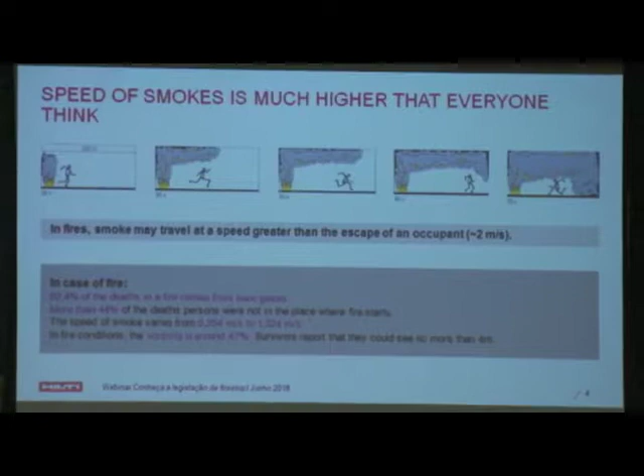One of the reasons is because smoke travels much quicker than fire. Smoke can move at a speed of 2 meters per second. There are plenty of analyses which show that. So we have 62% of deaths which come from asphyxia. More than 44% of people who die were not in the room where the fire started, which means the smoke travels from one room to another.

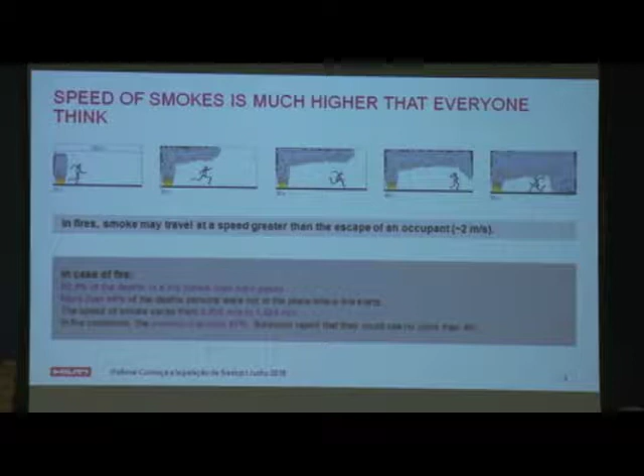In fire conditions, you also need to realize that smoke creates something like fog. You do not see anything. Okay?

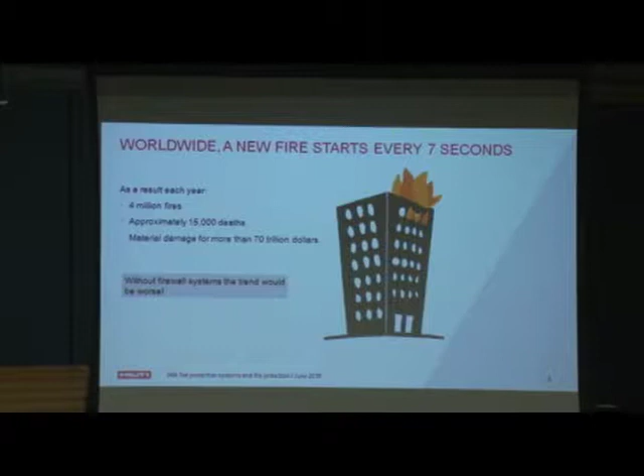In addition to that, we know that a fire starts every 7 seconds all over the world. So a lot of fires, and this really creates a lot of damage.

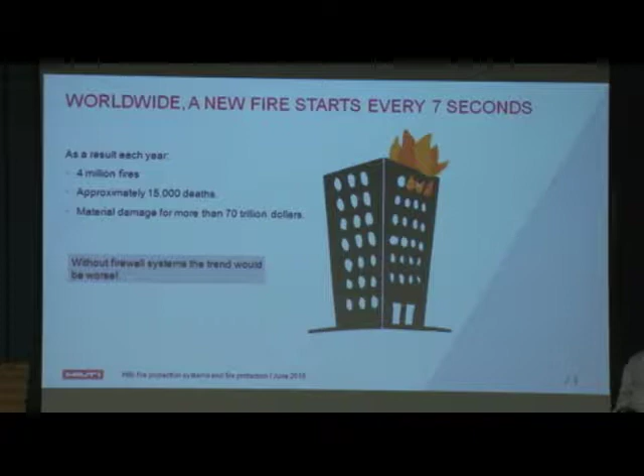In general, except for the example we saw this morning, the structure of a building is designed in accordance with fire safety. Compartmentation is there, but everybody forgets that when there's a fire stop wall, after the fire stop penetration, when we speak about fire stop product installation, it's only to close penetrations. Here you have a few examples where there were fires.

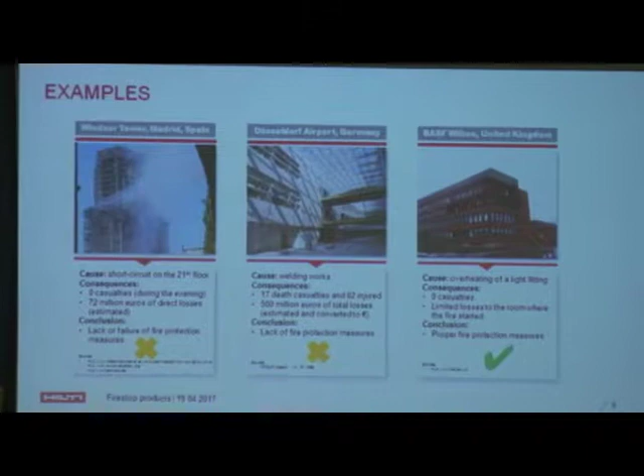It's not exactly the same because this is an international presentation, so it's not coming from Brazil, but I'm sure I could find the same example in Brazil. The first one was a short circuit on the 21st floor, and there was a complete lack of fire protection—building collapse. The second one was during site work for welding, and again a lack of fire protection, and the building didn't collapse but had to be rebuilt.

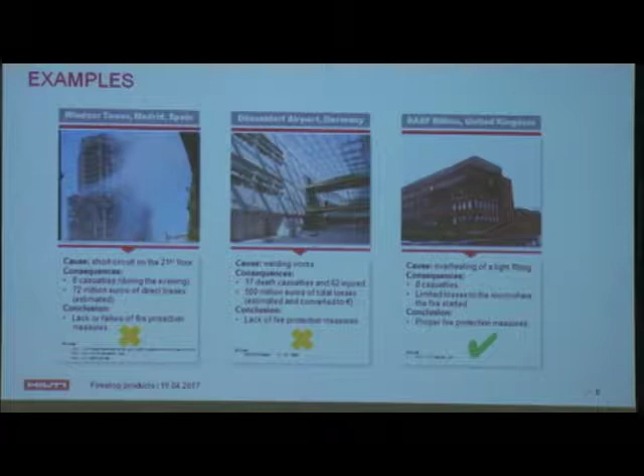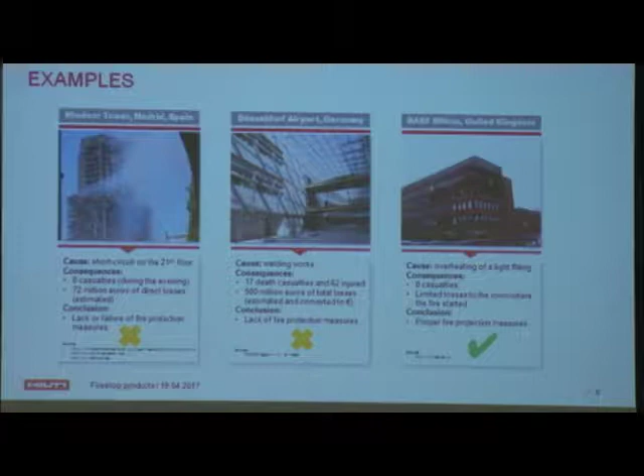The third one is also an example of a fire, but this time the fire protection was completely done correctly, including fire protection for penetrations. As you can see, 0 deaths, really limited consequences, just on the room where the fire was. So fire protection is a mixture of plenty of things, but openings is something which is important.

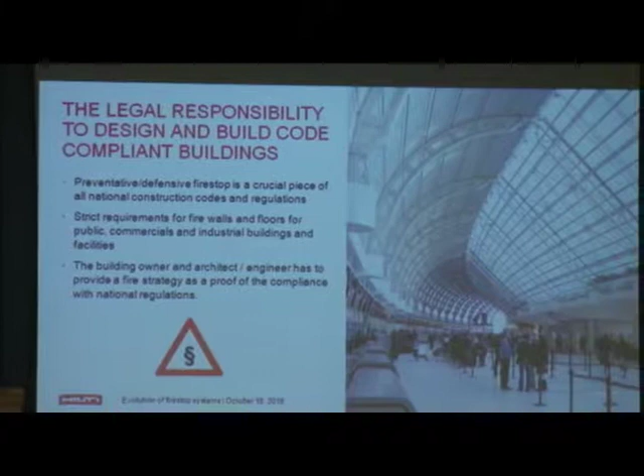If we go to regulation, I will not be the one who teaches you about regulation in Brazil—you know it much better than me. But there are a few things we can say together, because it's the same all over the world. It's the same in my country, in France, in Europe, in the US, in Brazil. It's the same everywhere.

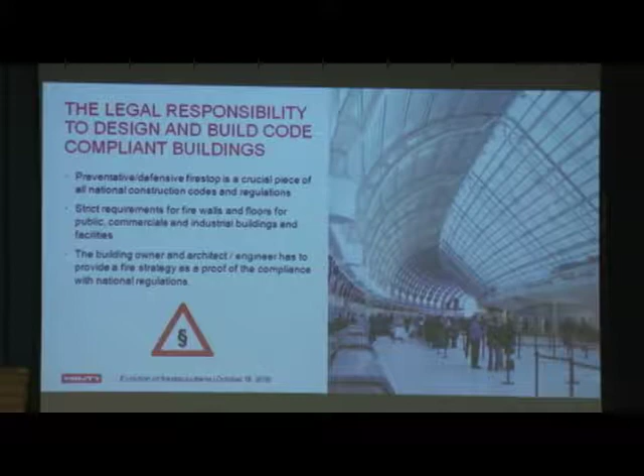Fire protection is crucial—it's a crucial piece of building engineering. And when we say fire protection, it's active and passive protection. I heard this morning about sprinklers, I've seen some hoses, and this is active protection. But passive protection is also very important to make sure that the fire stays in the place where it starts.

There is also something I like to remind everyone of. I don't know who you are—Camila told me that there are some constructors, some engineers, maybe some architects, some firemen. Everybody has a role in fire protection. It's not reserved just to the one who will install it.

It's also the role of the architect to schedule this very upstream, when we start the building design, going to the specifiers, the design office, who should specify it—not just say fire protection should be there, because this means nothing, and the constructor afterward will not know which product to use. So the specifier should really specify, and then the constructor should install the correct product. If we have the full chain of responsibility fulfilled, we are sure that in the end we arrive at the third example: one building, a fire, no damage.

And this is what we all want.

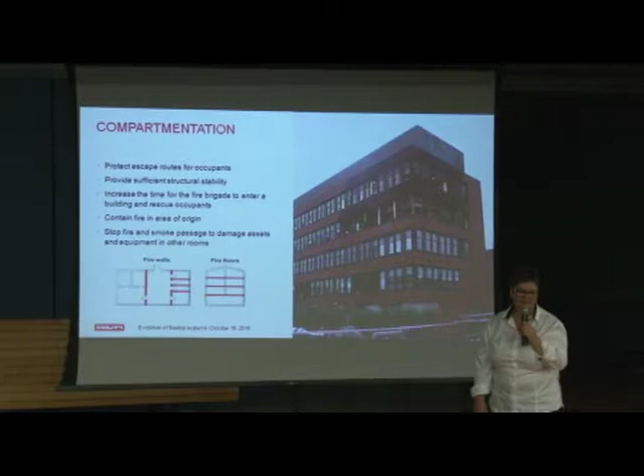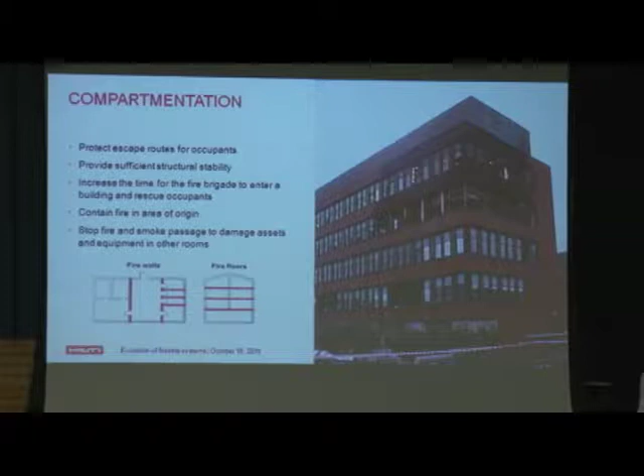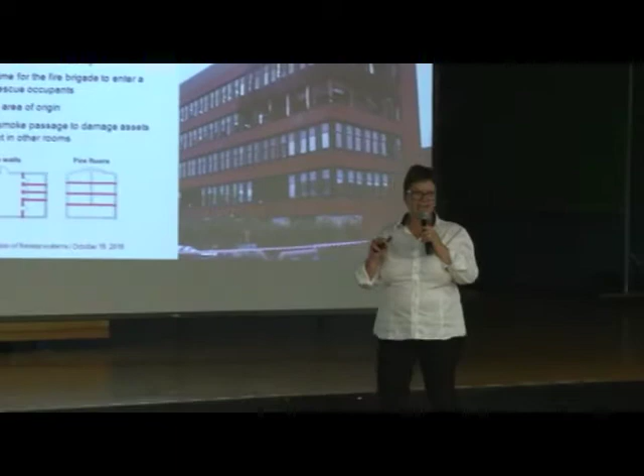Compartmentation - despite the fact that everybody thinks it's to protect the building, the main reason of compartmentation is to protect the fireman and the person who are inside the building to escape, and the fireman to enter to help those guys to escape. This is the ultimate goal. We want 0 deaths. Of course, if on top we can also protect the building, it's good.

But the main reason is really why we say, for example, that a firewall should remain 2 hours. After 2 hours, we think that the people - when I say we, it's the ones who prepare regulation - thinks that there will be no more people inside. So if the building collapses, it collapses, but at least there is no death. And so we have horizontal compartmentation.

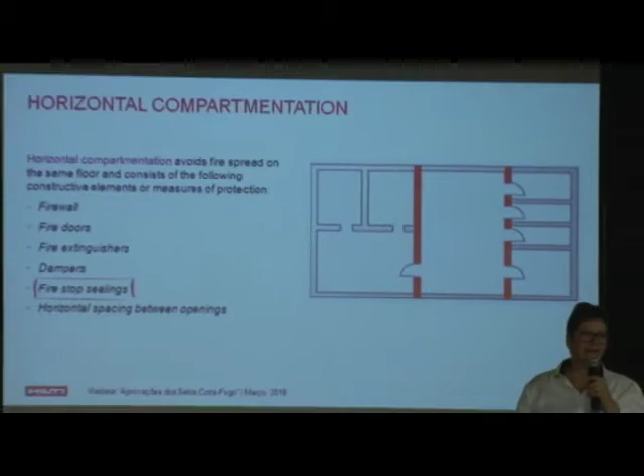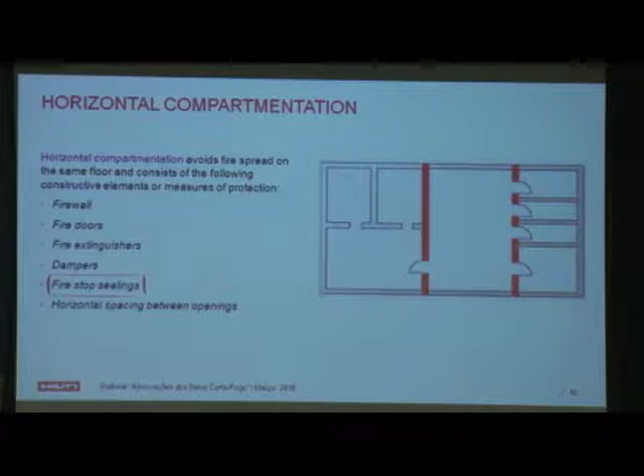I'm sure you have all seen a building, a hotel, a hospital, where you have a fantastic firewall, super fire stop doors, and just on top, a nice hole with pipes and cables, not closed. So what do you think is the efficiency of the wall and the door if just above there is a big hole with nothing to close it? Nada. Forget it.

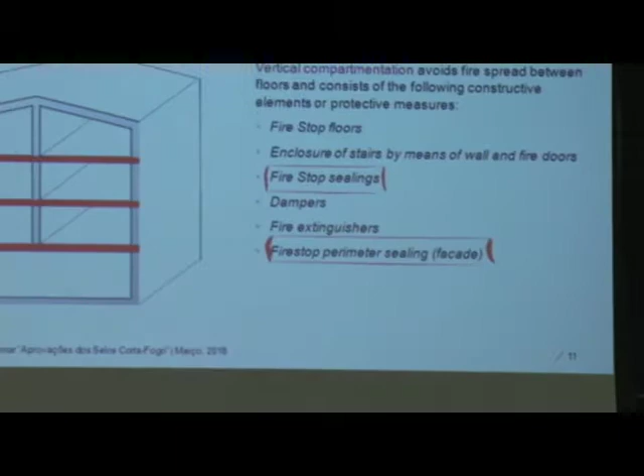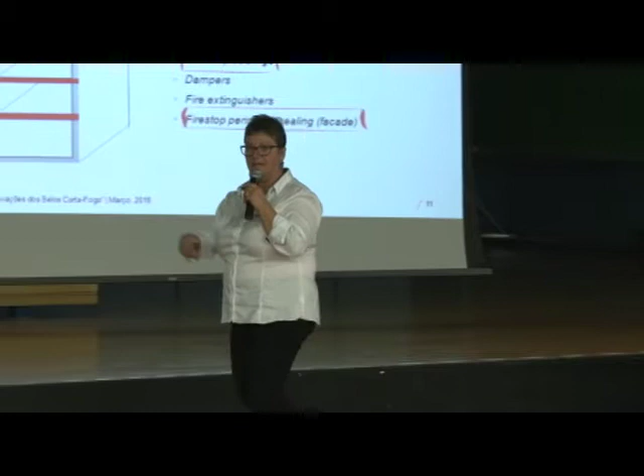The same for vertical compartmentation. The vertical compartmentation is, of course, for the floors, but it's also for the facade. Everybody has seen a tower, sadly, in fire, and we see the fire jumping from outside, from one floor to the other, because the facade is not protected. Again.

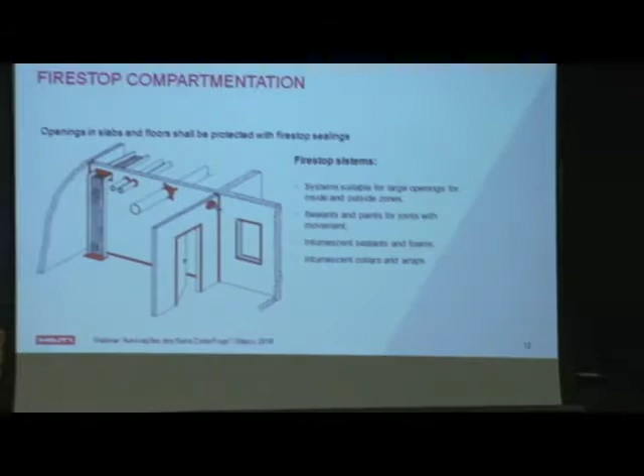And now we arrive to what I'm more used to - our product. You have plenty of different things in a fire. Is there a laser?

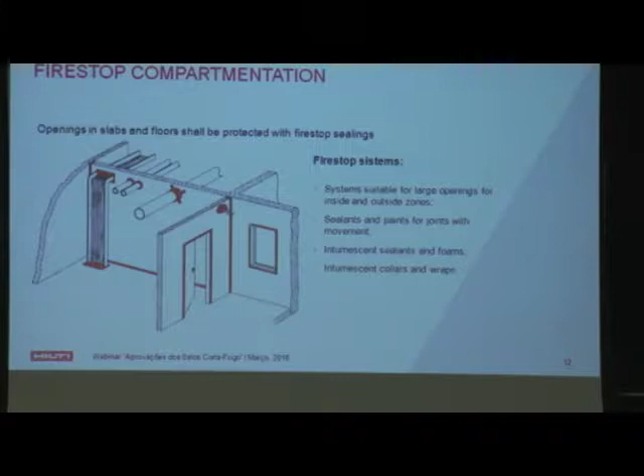Yes. So, doors, walls, floor, windows, okay, we all know. But here you see there is a cable. Here there is a pipe. Here you have 2 pipes. Here you have a cable tray. All these openings, if they are in a fire stop wall or a fire stop floor, they should be closed.

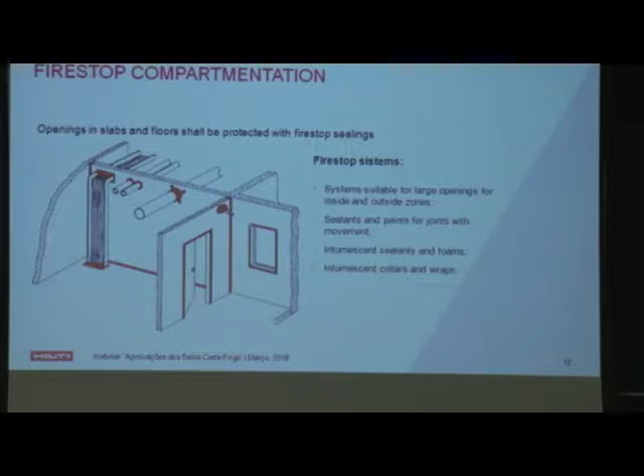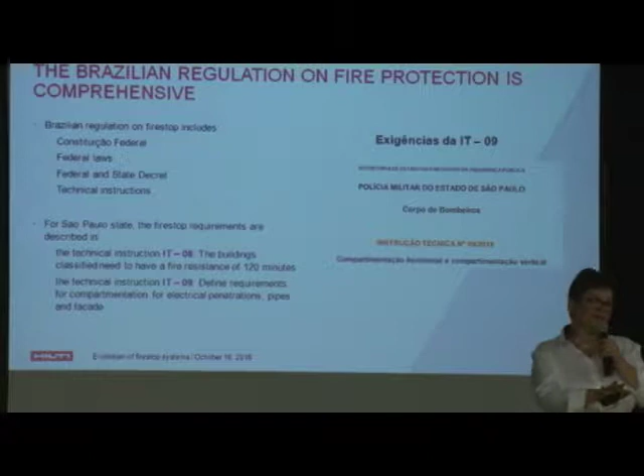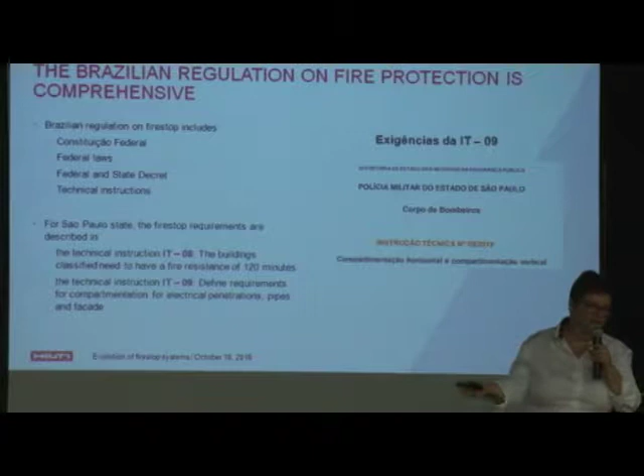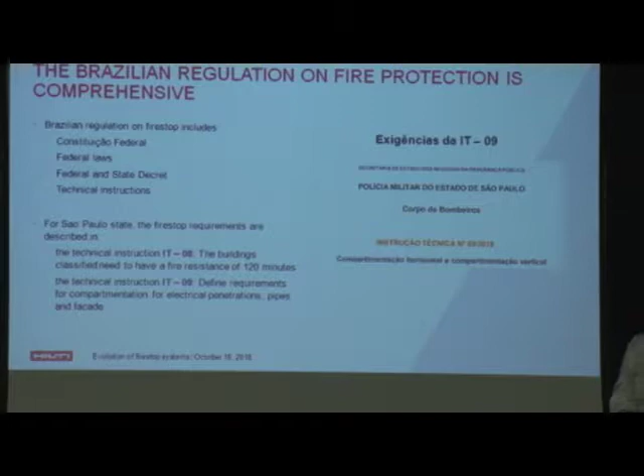I put this just as a reminder, but again, you know much better than me the regulation of fire stop in Brazil. All what I know is what Camilla told me during webinars. I'm listening to the webinars she's doing, and I know that there is plenty of regulation - federal regulation, state regulation, local regulation, standards, fireman documentation. You have plenty of documents. Now the main thing is to make it endorsed, to make it used, to make it live. So I will not describe this. It's your role, it's not mine.

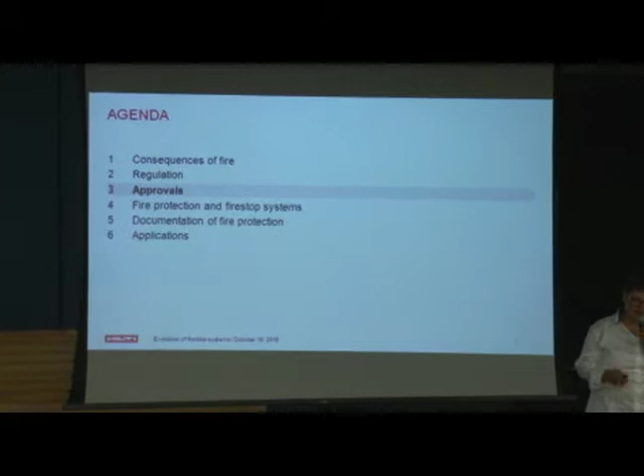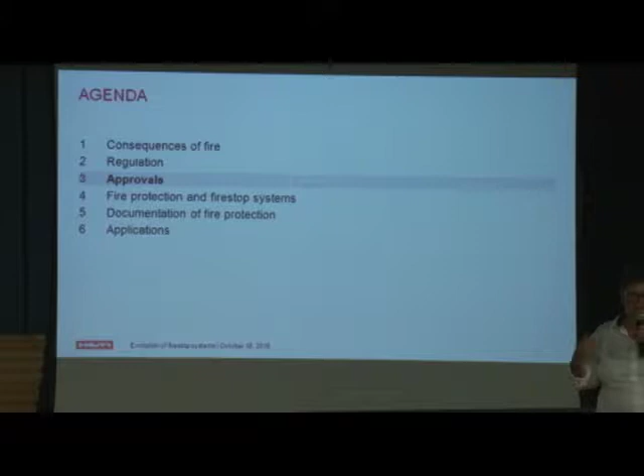And I will go to approvals, because there is several systems all over the world, including in Brazil, which are different. When we speak about approvals, it's a product which has proven that it has some fire resistance, in our case, with a third party. So it's not the manufacturer itself which says my product is good, because we can all say this. It's someone else.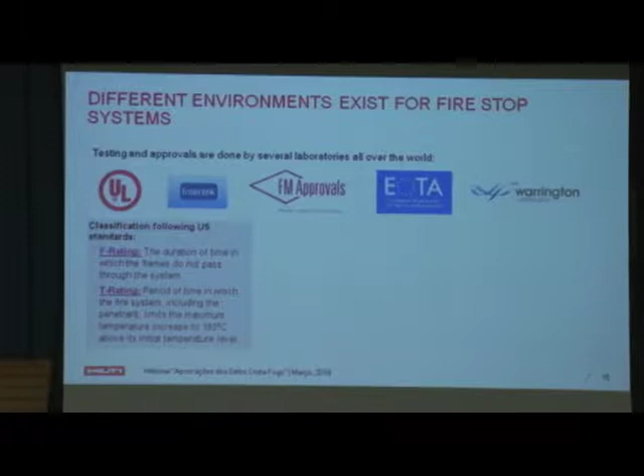So we have different systems. And here in Brazil, it's the third one, but sometimes we use the two first. The first system is a US system. So you have a certification which is done by UL, and they follow two different ratings, the F rating and the T rating. The F rating is obvious - it's a time where the fire, the flames, will not go from one side to the other.

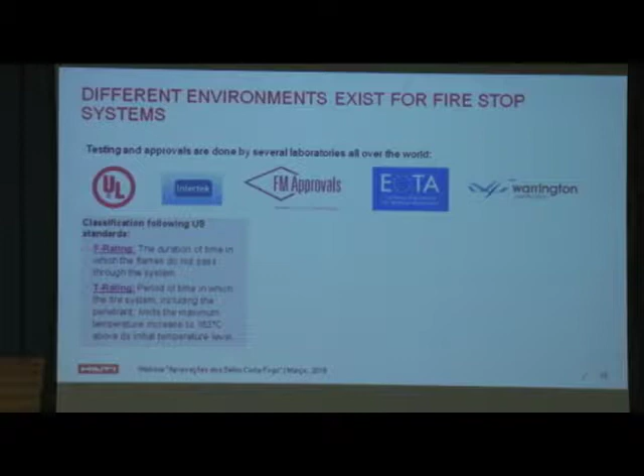In Europe, it's a little bit different in terms, but at the end it's the same. We measure exactly the same. Maybe there is one small test which is different, but at the end it's exactly the same. We measure the time where the fire do not go from one room to the other, and we measure the time where the smoke stays, and we also measure the time where the temperature on the other side of the fire do not increase more than 180 degrees.

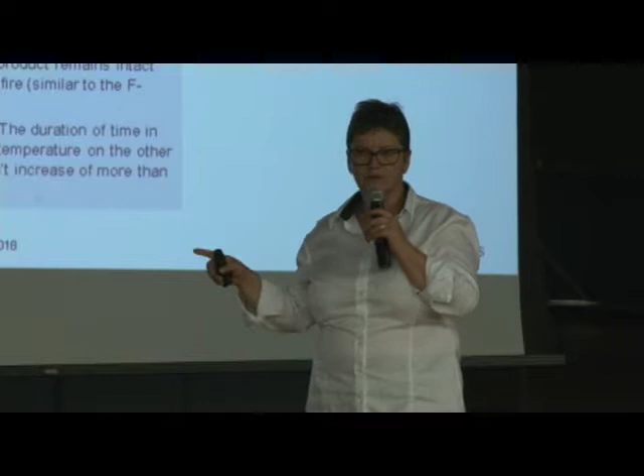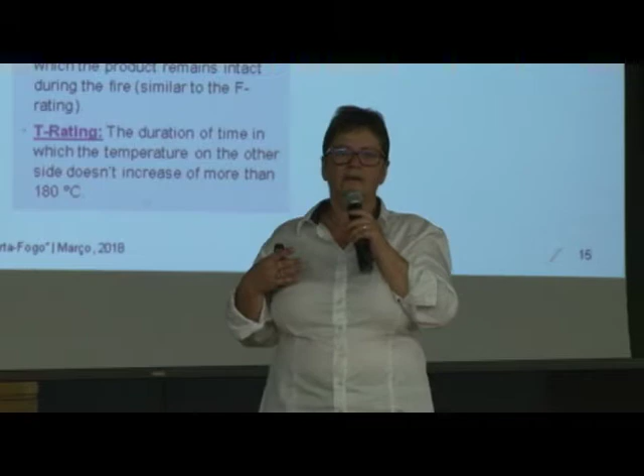Because if you have too high a temperature in the other room, even if the fire do not jump, there can be some auto-ignition because it's too hot. And if it's too hot, you have some product which can auto-ignite. I don't know if you have seen some video, but I have seen some which are very impressive, where you see, just by heat, you see

auto-ignition. And the third system, which I put here, it's the Brazilian system. But at the end, it's not exactly the same, because in Brazil, we have only a test standard. We do not have approvals. We do not have a paper which says this product has this performance with acceptance criteria.

What Camila and the team do in Brazil is combine tests done in Brazil, of course, because we are in Brazil, with approvals which we have from other countries, from Europe or from US, depending on the case, depending on the product.

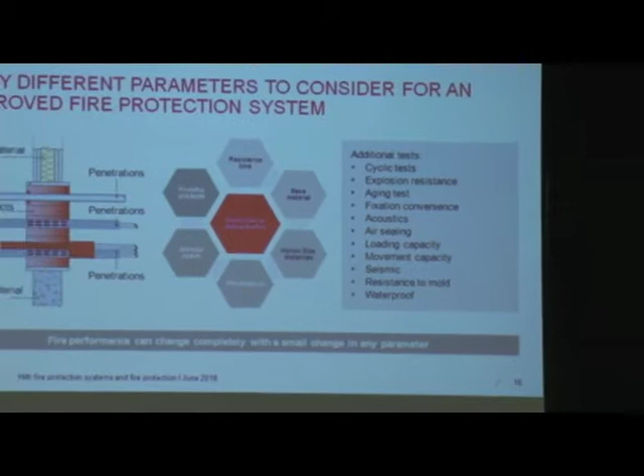Because when you look at fire resistance, you cannot imagine the number of parameters. When we create a fire stop test, you cannot imagine the number of different combinations we could have. Sometimes you have to take care about the base material. Is it concrete? Is it masonry? Is it wood? All those kinds of materials exist in the market.

Then we need to take care about the distance, because if you have two pipes which are close to each other, for sure the protection will be different than if you have, I don't know, 10 centimeters between the pipes. So you imagine the number of combinations we could have.

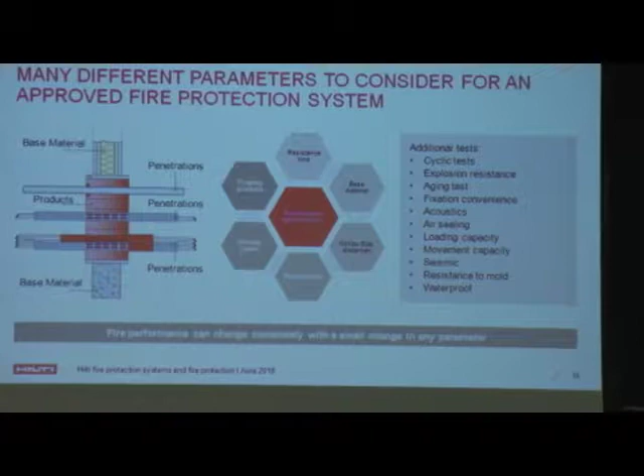Because the penetration element is important. A PE pipe will not burn like a PVC pipe, will not burn like a metallic pipe. A cable, there are so many cables, they do not burn the same. And we always need to have a product which will close the gap. If the pipe melts, we need to make sure that the opening will be closed immediately.

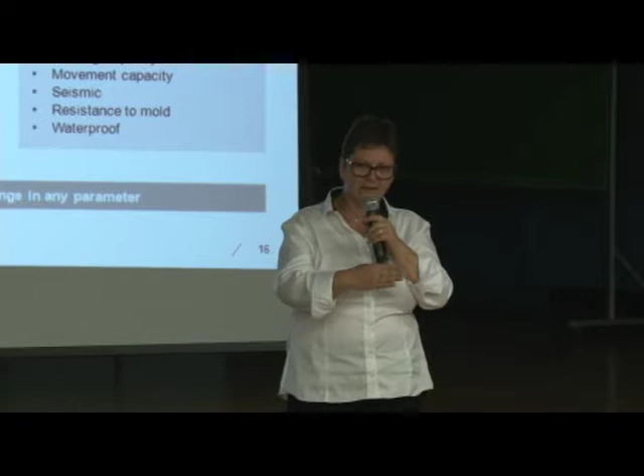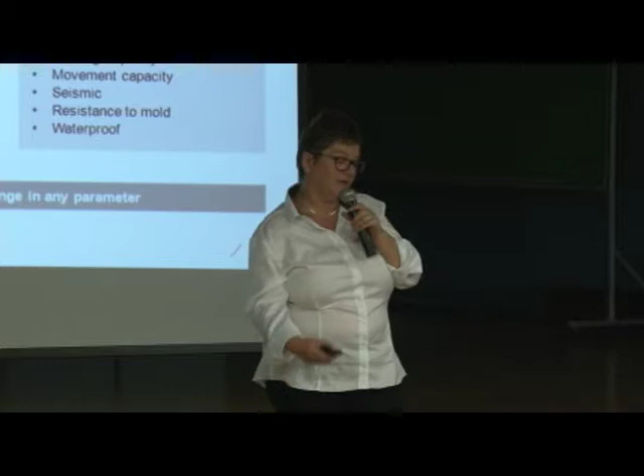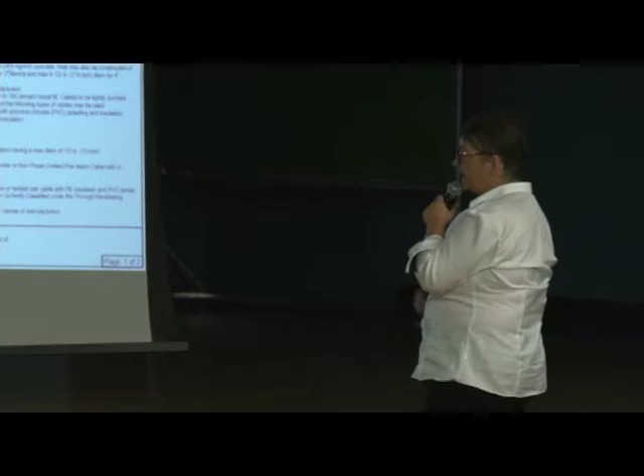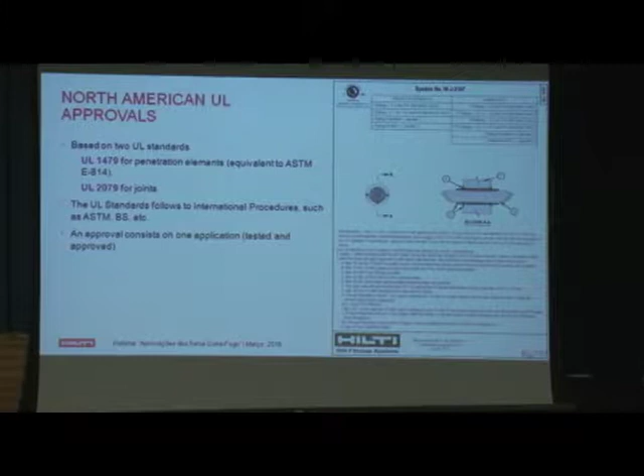So when you see a US approval, it's normally done by UL. We have two standards in US which are important to know. One is for penetration element, and the other one is for joints. When you have two slabs of concrete in a parking, for example, I remember one parking where I finally decided not to stay and to leave my car because the space between the slabs was something like 2 centimeters, completely open. I tell you, it was not fireproofed.

And you have one sheet of paper per type of application. So you always have the same way of presenting. You have the information, the ratings and so on, the sketch on how it should be installed. Let's take the example of a collar. Sometimes you put one collar behind. Sometimes, due to the size, you need one collar behind and one on top because it's a very big pipe, and just one collar will not be enough to close the gap. Sometimes you need to have a sealant around a product, sometimes not. All these kinds of details, which I don't know by heart because it's impossible to remember everything, but I know where to find them. It's in this kind of documents.

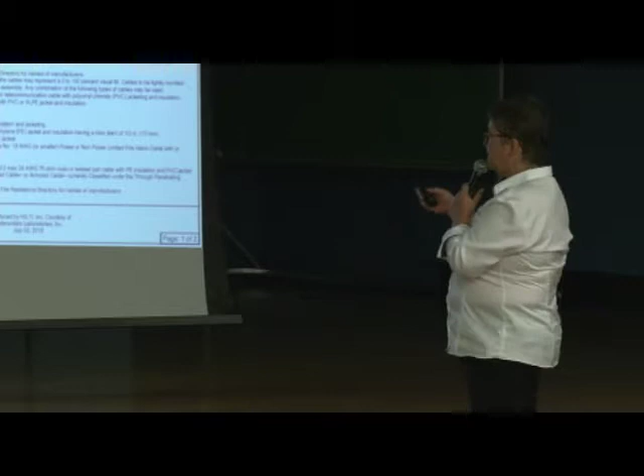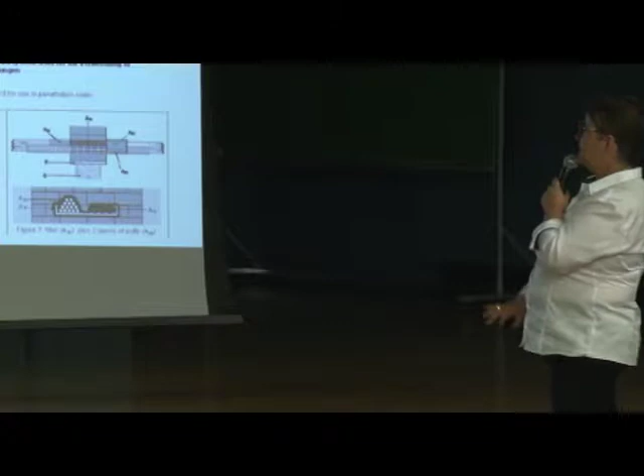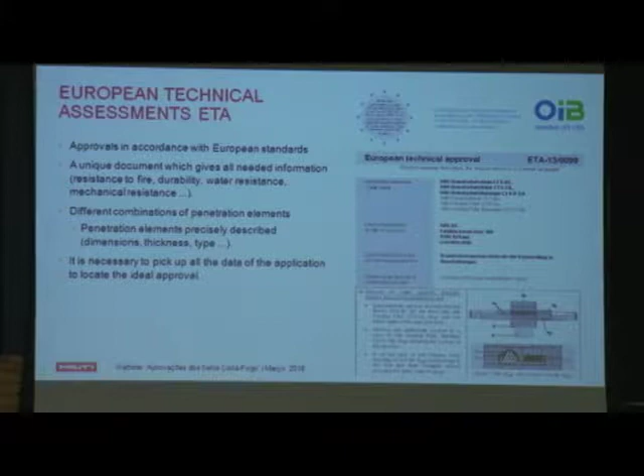So in US, it's one sheet of paper per type of application. Where in Europe, it's completely different. In Europe, we have one approval for one product, which can be... and I think when I was still in France, the most important one was for the endless collar. It was a document of 120 pages, because you have all the applications tested in one document. Everything is in one document. And then you need to be very careful when you choose your application. So you need to really study the type of materials, the positions, the penetration elements, the dimensions. It's really, I would not say a science, but nearly a science. And of course, if you do not take the good product, the result may not be the one you expect.

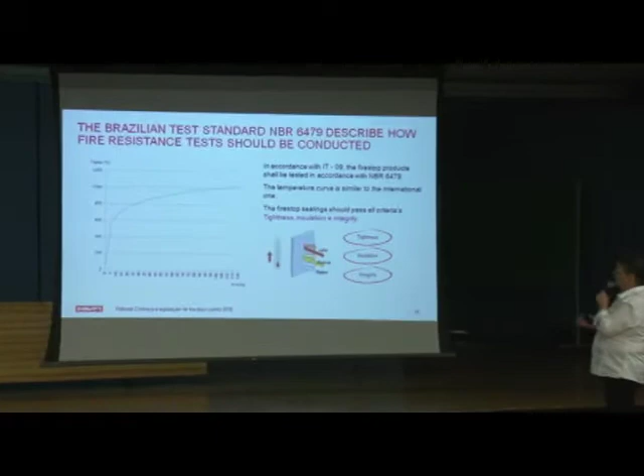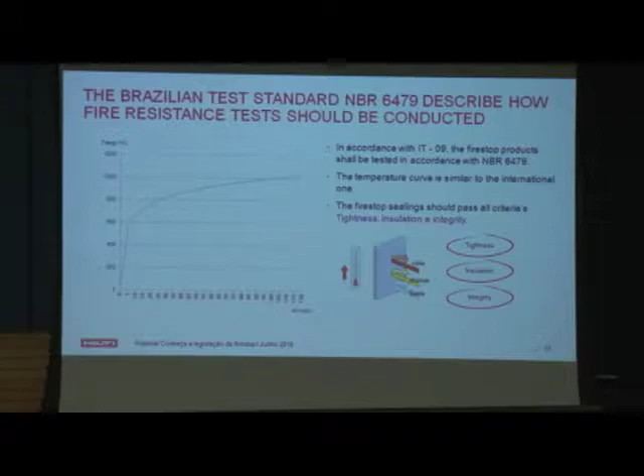And in Brazil, as I told you, in accordance with IT 09, there is a test which is described, which is done by IPT, at least — maybe there are some others, but we work with IPT. And this curve, I know it, because it's exactly the same as the ISO curve, the US curve, the European curve. It's always the same curve, which shows the increase of temperature in the furnace. But again, when you do a test in Brazil, you just have a test report of what you have tested. You do not have any approvals because it does not exist. Maybe in the future, if there is some work done in terms of preparing the framework, it can be done, but today it does not exist. Nowhere in Latin America — I'm working for all Latin America and it does not exist in Latin America.

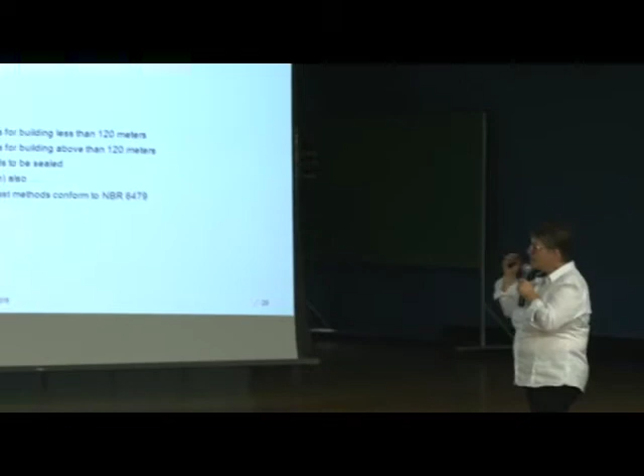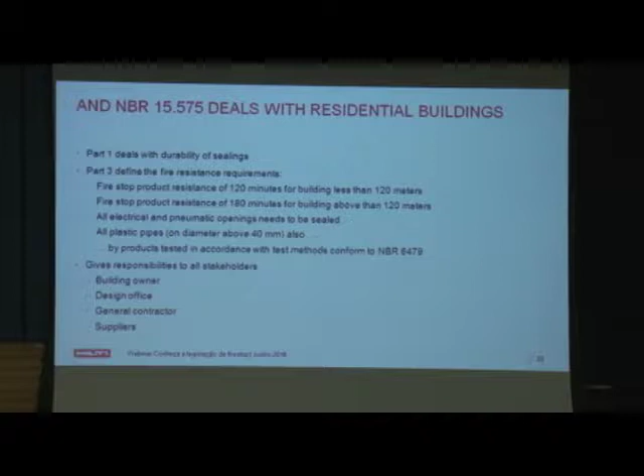And you have also some examples — I took this one because I really like it, I already said it by the way. You have one standard which speaks about how to design a residential building. And in this standard, it really says that there is responsibility for everybody: the architect, the owner, the design office, the contractor, the specifier, and of course the fire brigade who do the inspection. So it's everybody who is concerned by fire protection, not only the one who installs. Again, I insist because I've seen so many design offices who told me, oh no, this is not for me, this is for the job site. No, it's for everybody.

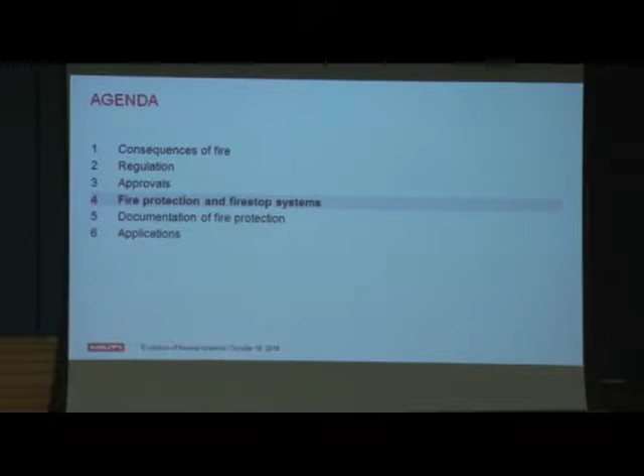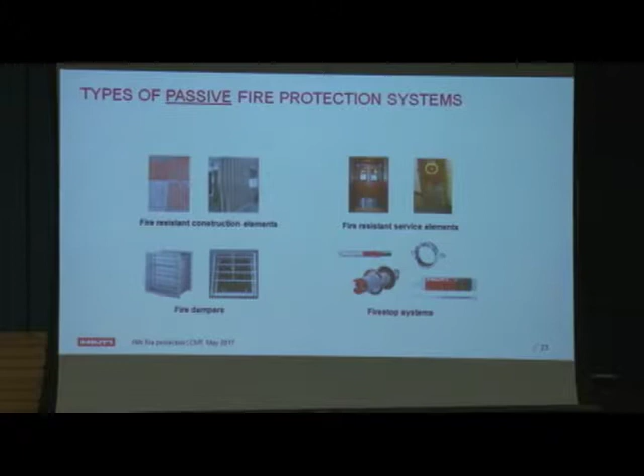Now let's go to the product. I did not speak at all about Hilti since the beginning of my presentation. Of course, for the product, it's a picture of our product. I do not do a picture of our competition. So, active protection, passive protection.

Passive protection has different types of elements, normally grouped in 4 groups. You have the construction elements, the wall, the concrete, the masonry, which are fireproofed. You have service elements like doors, windows, glass. I've seen a promotion of a fire stop glass at the entry of the auditorium. These are elements for building.

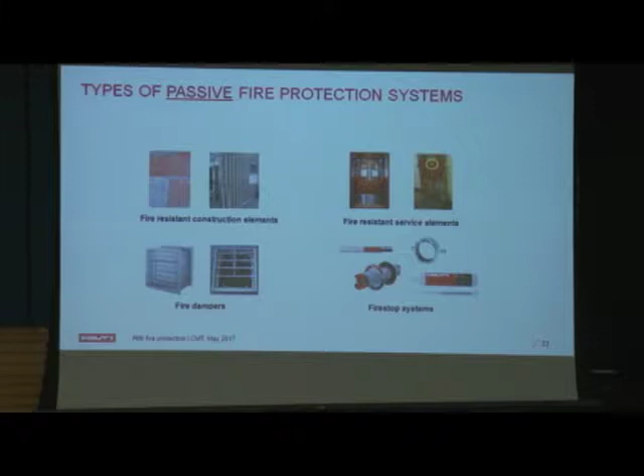You have dampers, which are very important to extract the smoke. And then you have our fire stop product, which again is used to close openings. And this is a small sketch which shows you all the different types of penetration which we can close.

And there are so many. You cannot imagine how many cables or pipes are running in the hidden part of a building. No, you can, for sure, it's your job. But we always forget them. At the very end, the fire protection of those small elements is forgotten.

And this should be the complete contrary. This should be studied at the very beginning. Because sometimes if you organize the pipe better, the fire stop system will cost you half the price, because you are in a range of application where you can use only one jacket or one collar. And if you put 2 big cable bundles, here you need 2, and of course the price will be doubled.

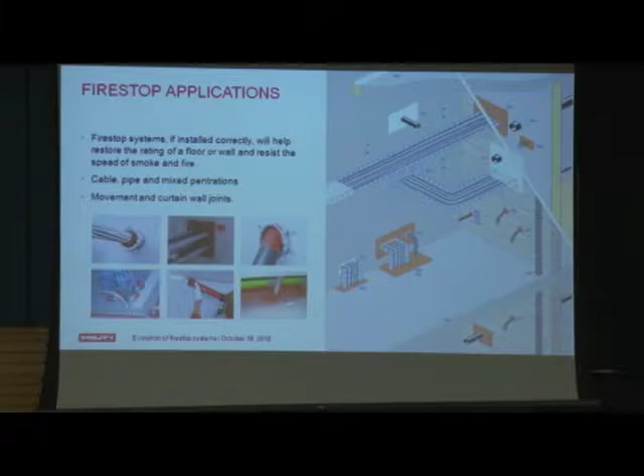Very basic. So when we say fire protection is expensive, it's expensive when you do it at the very end, because you have no other choice, because the fireman is here and tells you no, you cannot open your building because you missed that. At this moment, yes, it will cost a lot. But if you have designed it 1 or 2 years before, the cost will be peanuts compared to the cost of the building.

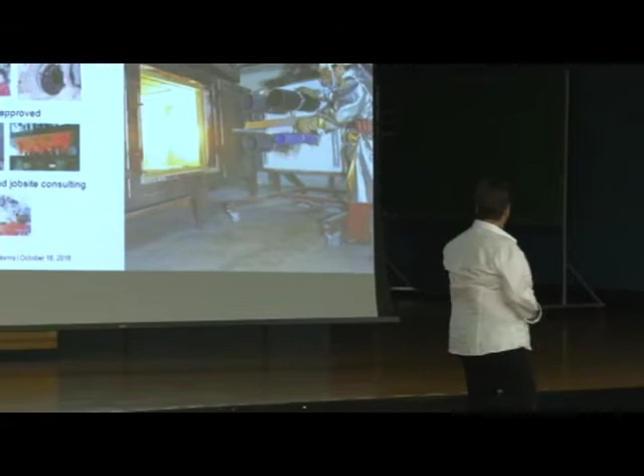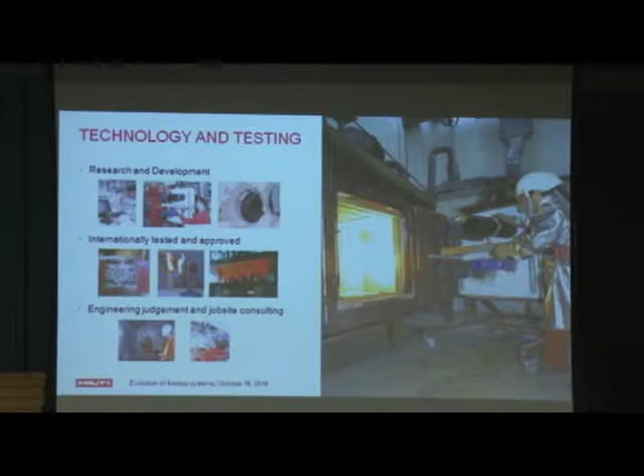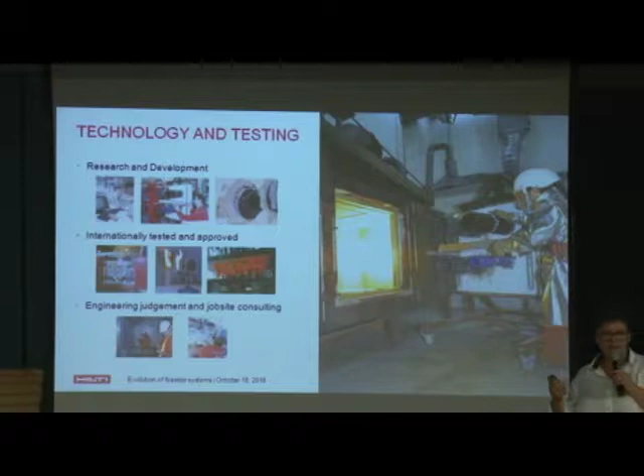In Hilti, we also take very seriously the safety and quality of our product. So we have huge research and development, and we have our own furnace. We have 2 places in the world where we can do fire tests for our product: one in Kaufering, Germany, where we have our development system for European products, and one in Dallas, where we do development for the US product.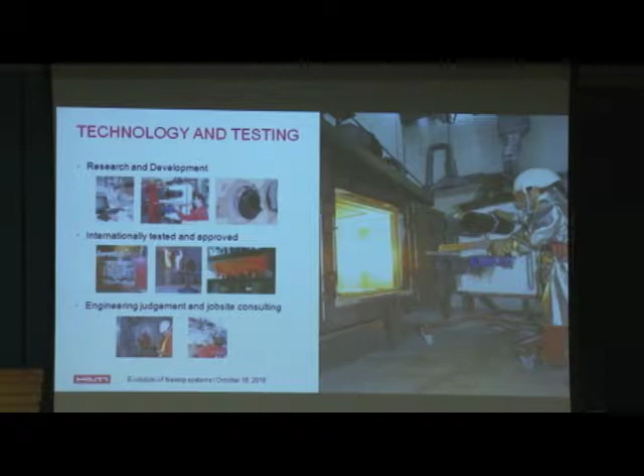And in both cases, we have a furnace, and I've seen myself some fire stop tests done there, which are really impressive. I had once the experience to see a fire stop test which failed, and this is why it's important to test. This is much more impressive than a fire stop which runs, because if it's running, you see nothing.

You are in front of the furnace and you just wait because nothing happened. But when it failed, I tell you, when you see the speed at which it failed and you have to evacuate the lab - this happened to me once. When I came back home in the evening, I still had a headache, and my husband asked me, what happened? Oh, I just smelled smoke. I think I had the feeling of being smoked.

It was really awful. And if you have the opportunity to go see a fire stop test in Hilti or outside, go. Because I tell you, to be aware of the danger, this is the best. For me, this was really helpful to understand the danger of fire.

And we also can do engineering judgment, because I told you, we cannot test everything. It's impossible. The architects have a lot of creativity, the design offices have a lot of creativity, and we cannot test everything. It's just impossible. So sometimes, because we know that in Poland or in Germany there was a test done which is similar, we can do what we call engineering judgment in some cases in order to avoid redoing a fire stop test. Because of course the ultimate solution is to do a test, but to do a test you need 2 months minimum to organize it.

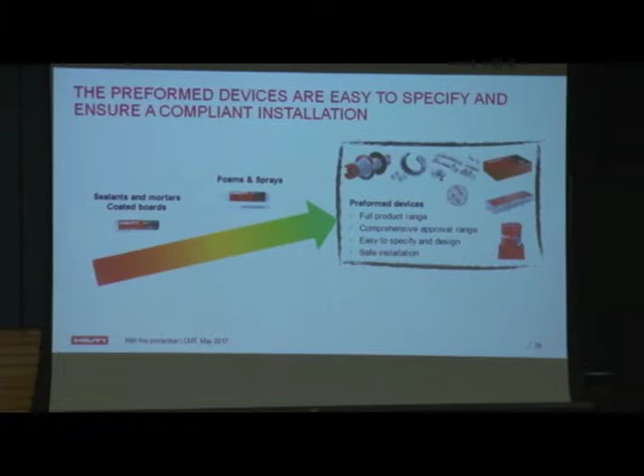This is my preferred slide in the presentation, because when I arrived in Hilti in '99, firestop was just mineral wool and sealant. This was the only product which existed in Hilti.

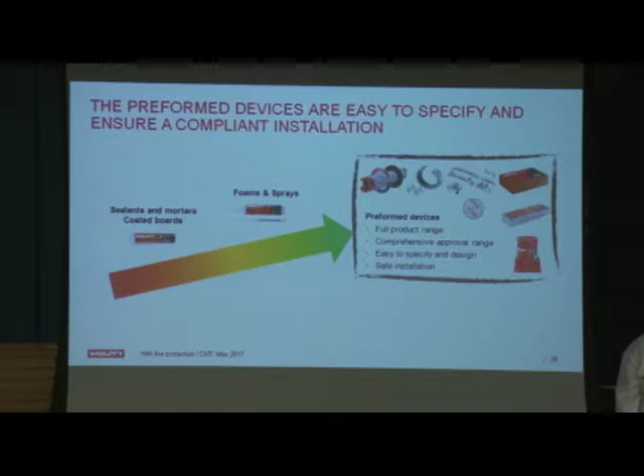I don't know if you have yourself installed mineral wool and sealant. I do, and I forget my gloves. I tell you, to install mineral wool without gloves is a disaster, and to install a mortar you need hours. So we developed some products which were easier to use 10 years ago, like foams and sprays.

But still, to install a foam you need a dispenser, and to install a spray you need a dispenser. So now we are on the next generation of products, products which are installed on their own.

Imagine, this is a cable disc. It's like a sticker. You put it around, you take out the sticker, you put it on the wall, glue it, done. Fireproofed. You do not need anything anymore. It's just there. We have plenty of examples.

This one has just been launched in Brazil. How do you call it in Portuguese? Split sleeve, okay, so it's the same as in English. The split sleeve is metallic, contains inside something like socks of intumescent product.

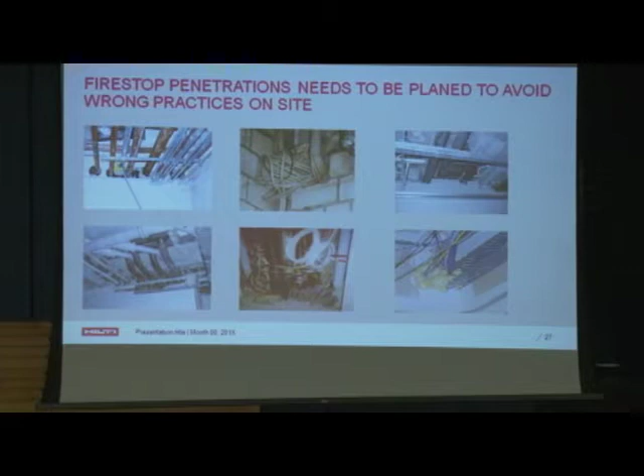And if you schedule it in advance, this is to avoid these kinds of examples. Because here I tell you, with a fire in these conditions, the building will not survive. Look at the gaps, look at the number of cables. How do you want, with such a concentration of cables, to avoid the smoke going inside between the cables and arriving on the other side?

It's impossible. Probably this should have been cut in two, with two different openings. Again, if it's done before, it's possible—here it's much too late. And of course it will cost a lot of money, because here you need to build a box around with plasterboard or mineral wool. But it's impossible to solve this case.

But you cannot imagine how many times we are called to job sites for such examples. These are pictures which we took ourselves. These are real examples.

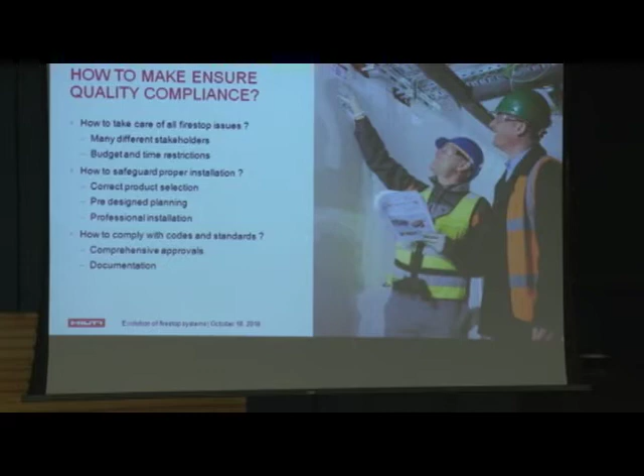Another important thing, which I think everybody who has to do audit or inspection of job sites cannot argue against, is documentation. How do we remember, how do we prove that the job has been done correctly and that the fire protection is there?

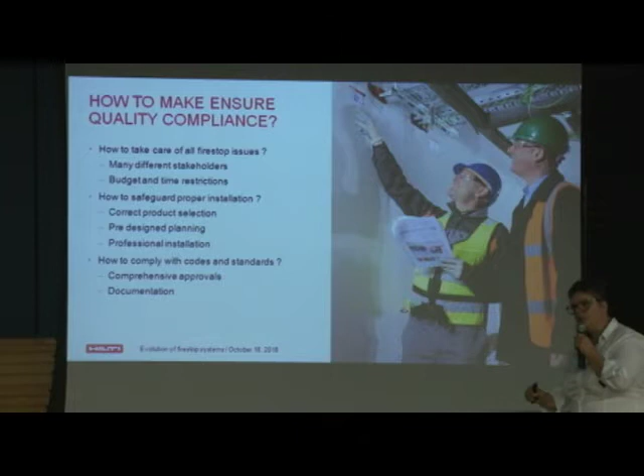How to make sure that we have the correct installation? How to make sure that this is the correct product which has been installed on site? Sometimes in a hospital you can have thousands of openings. How do you make sure the contractor has put the correct product on opening 1, on opening 2, up to opening 1000? The best way is to document this.

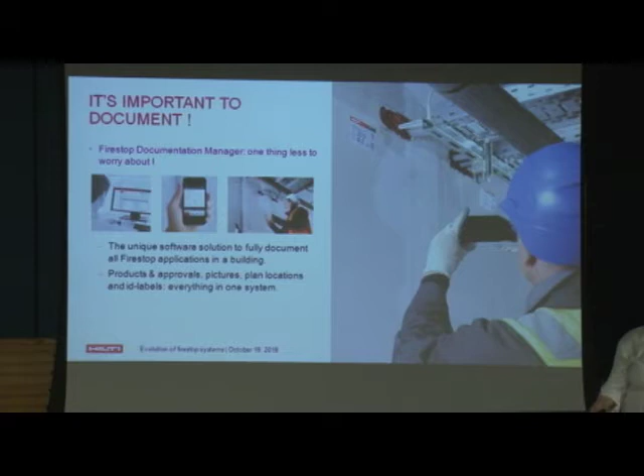And for this, there is some software which exists in the market to document fire protection. I will not do more publicity, but if you want to know more, you can just ask Camila.

And when you see applications, these are the pictures I would love to see each time I'm going on a job site—pictures of applications done correctly, with a nice mineral wool coating done correctly.

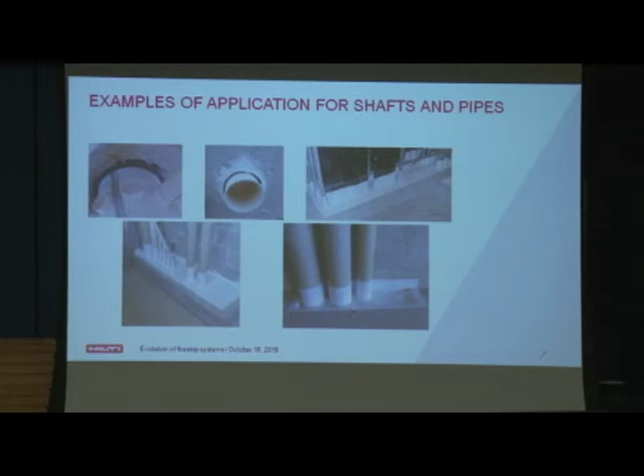Here you have a fita, how do you call it? Fita intumescente. Here you have again mineral wool. Here you see some bricks, here also you see some bricks, here you see some plugs.

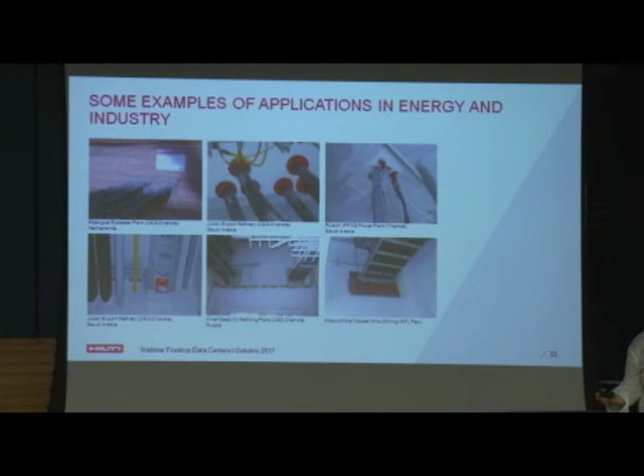So these are penetrations which are correct, meaning that we all hope there will be no fire, but if there is one, the fire will not go to the other side and will protect life and assets.

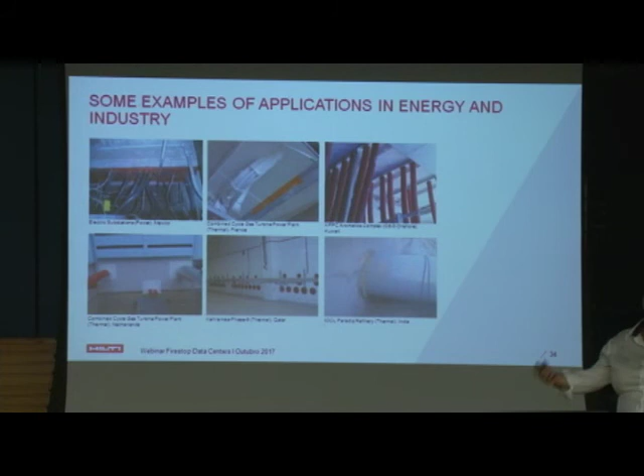So I have plenty of examples, and I have examples all over the world because we have a bank of references in Hilti. It can be in buildings, in power stations, in industry, everywhere. We have plenty of examples where it's very important. And that's all.